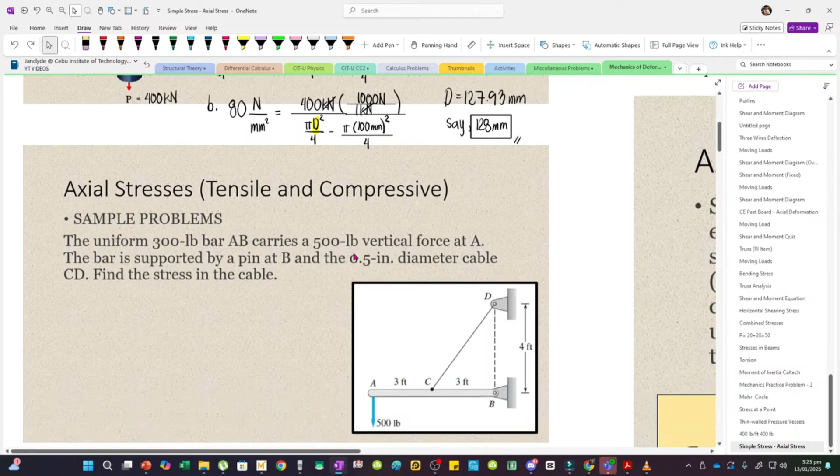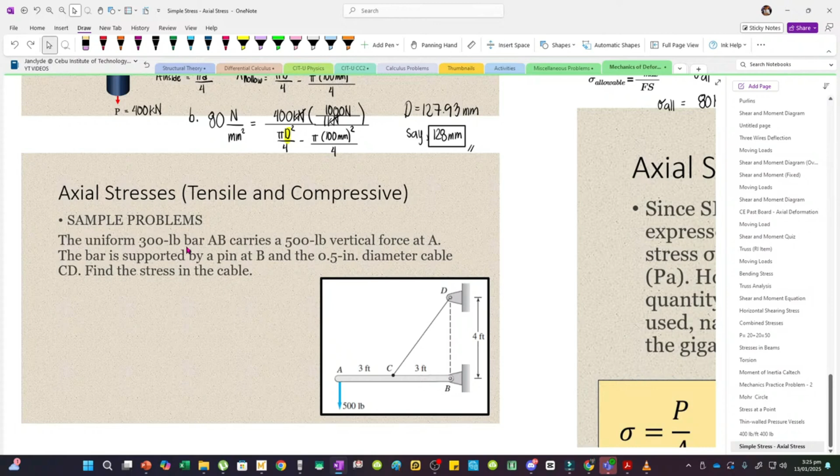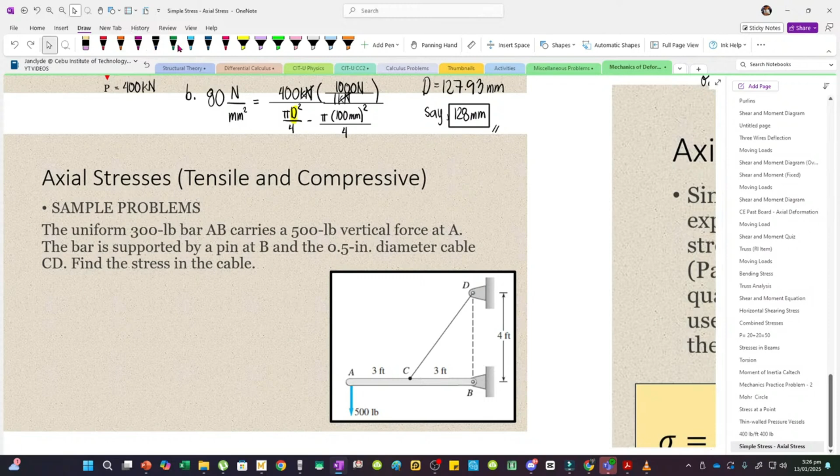Ayan. So for the second problem, a uniform 300-pound bar carries a 500-pound vertical force at A. The bar is supported by a pin at B and the 0.5-inch diameter cable CD. Given pala to. Find the stress in the cable. So ito yung cable natin. Ayan, cable CD. So nakikarry yan ng tension force.

So yung FBD natin, we can reduce it by making this cut. So we can reveal the internal force. And then to obtain the force in CD, pwede tayong mag-moment sa B. So summation of moments about point B equal to 0. We would have negative 500. Counterclockwise kasi yung rotation na makokos niya about point B. So this is with the assumption that positive is clockwise, and the negative naman is counterclockwise.

So minus 500 times 6. Moment arm niya is 3 plus 3, so 6. And then, don't forget na merong weight na binigay. Uniform 300-pound bar, na mag-a-act yan sa centroid. So yung centroid ng figure is andito. So meron pala yung 300 pounds. So this is for the weight. So isasali natin yan sa calculations. Yung makukos niya na rotation about point B is counterclockwise din. So minus 300, then multiply natin by 3 feet.

And then yung CD naman, meron siyang vertical saka horizontal components. So yung vertical component niya, this is CDY, and then yung horizontal component is CDX. Pero yung CDX, tatama siya sa point B. Meaning pala, hindi siya kasali sa magkukos ng rotation. So yung CDY lang, magkukos siya ng clockwise rotation. So plus CDY, and then our moment arm is 3 feet lang, perpendicular distance. And then equate natin to 0.

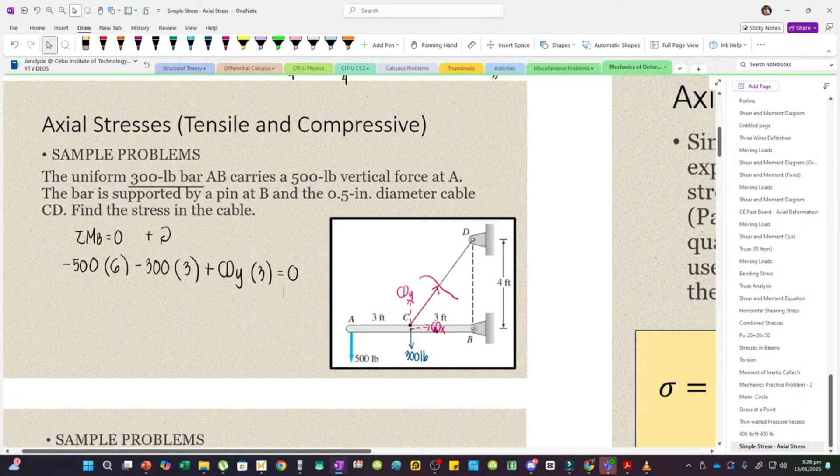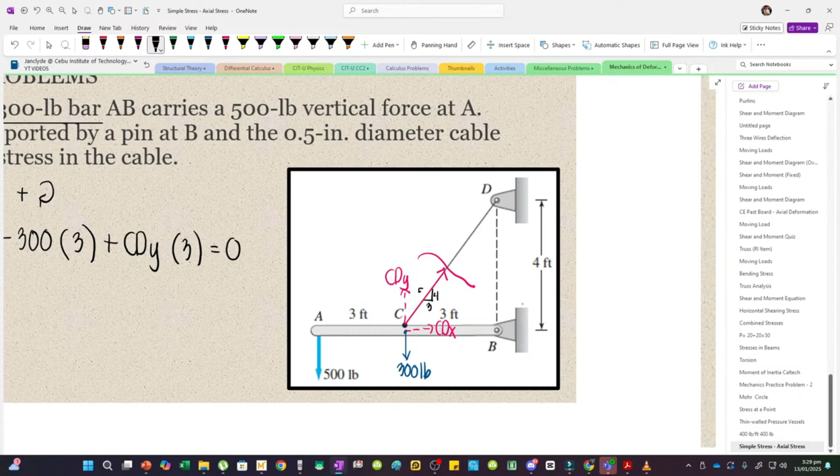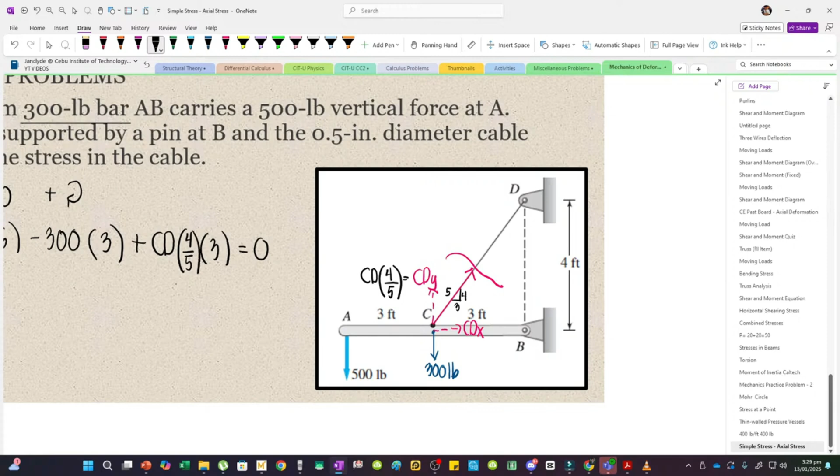But pwede rin na para ma-solve natin yung CD agad, we can take the component CDY. Now alam natin na for this triangle, the horizontal distance is 3, the vertical distance is 4. So 3 saka 4, solving the hypotenuse, magiging 5 yan. Square root of 4 squared plus 3 squared. So essentially 3, 4, 5 triangle lang. So when getting CDY, we have CD times the vertical distance 4 divided by the hypotenuse, which is 5. So papalitan ko na lang to. Yung CDY is CD times 4 over 5. And then we can solve CD.

So minus 500 times 6 minus 300 multiplied by 3 plus CD times 4 over 5 multiplied by 3 equate to 0. CD pala is 1625. Pero yung unit natin is pounds. Naka-pounds kasi yan lahat. So alam na natin yung force ng CD, pero yung tinatanong is stress in the cable. So yung stress ng cable, label natin as stress CD. This is force divided by the area.

Force is 1625, naka-pounds yan. And then our area is 0.5-inch diameter cable daw. Now yung 0.5 dyan, hindi pa yan area. Yung diameter pa yan. So the formula for the area of a circle, di ba, pi d squared divided by 4. So yung area is pi times diameter, 0.5 inch, tapos squared, divided by 4.

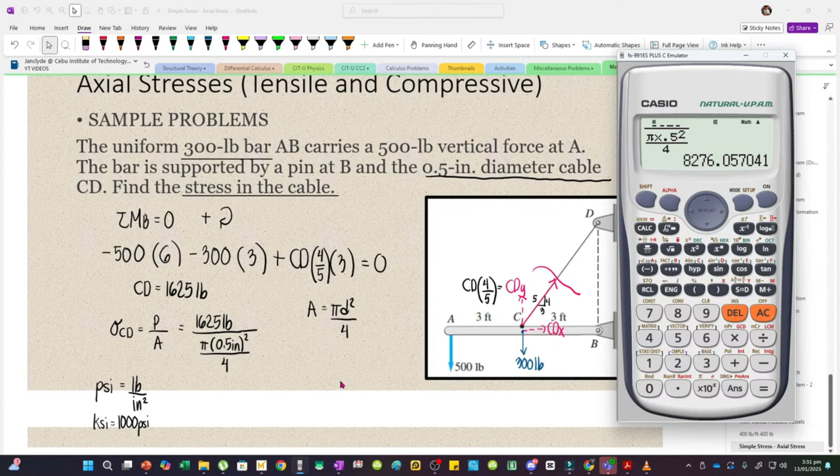Now, pounds divided by inches squared, yung tawag natin dyan is PSI, equals pounds per square inch. Isa to sa mga importanteng units. And then kapag KSI naman, parang 1,000 PSI lang yan. Ito usually yung makikita nyo sa mga units kapag English units. So input na lang natin 1625 divided by pi times 0.5 squared divided by 4. We have 8276.06. And then, naka PSI. Again, pounds per square inch.